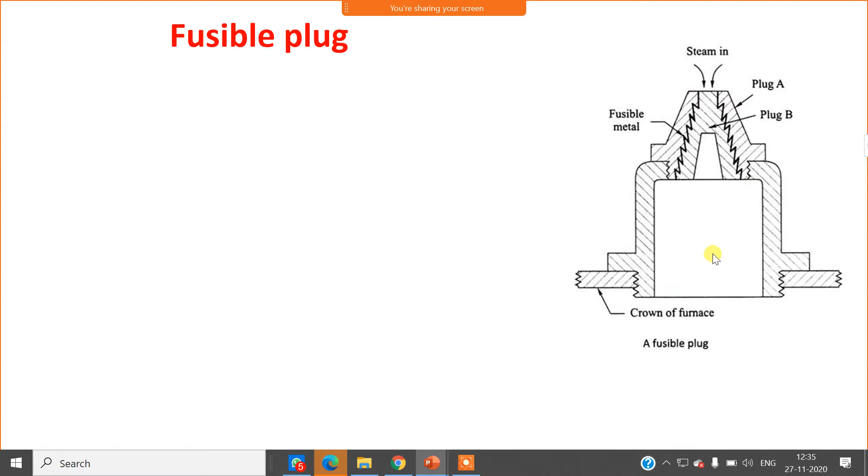Now to prevent the bursting and burning of the tube, fusible plug is provided. At very high temperature, fusible metal melts and it drops in the furnace, and it creates the opening for water to enter. Steam pushes the water inside the furnace, and in the furnace fire extinguishes. Fire stops, so that the combustion stops and formation of steam stops. The function of fusible plug is to prevent the boiler against damage due to overheating for low water level.

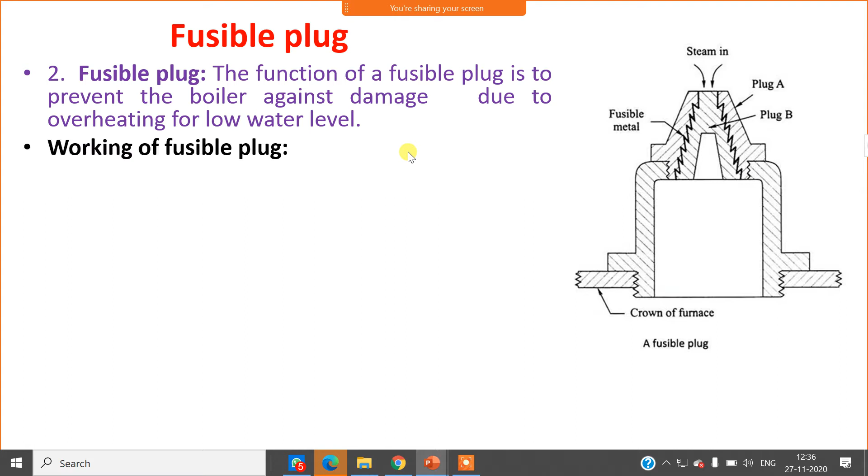If the water level is very low and due to high temperature, fusible plug prevents the boiler against damage due to overheating. Now working of fusible plug: during normal operation, the fusible plug is submerged in the water so that it should not melt at operating condition.

Fusible plug melts only when the temperature is above the operating condition. During the normal operation, the fusible plug is submerged in the water, which keeps the temperature of the fusible metal below the melting point. But when the water level falls below the top of the fusible plug, it is uncovered by the water, then due to high temperature, fusible metal melts. The fusible plug therefore melts by the heat of the furnace.

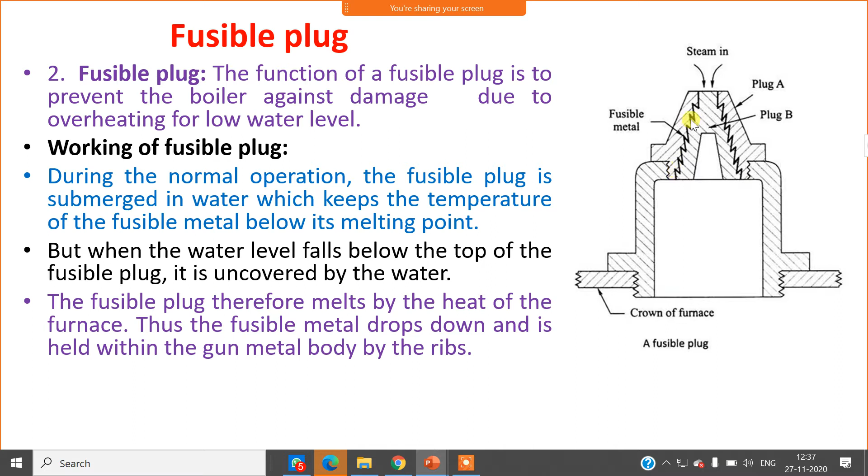Thus the fusible metal drops down and is held within the gunmetal body by the ribs. The fusible plug is made up of gunmetal, but fusible metal is different. The metal which is going to melt is called fusible metal. It is made up of different material, and the fusible plug is made up of gunmetal to avoid rusting.

The opening so made allows the steam to rush into the furnace and extinguish the fire. The opening created in the fusible plug allows the water and steam to enter to extinguish the fire. The damage to the firebox which could burn up is avoided. Due to overheating, the damage to the boiler can be avoided with the help of fusible plug.

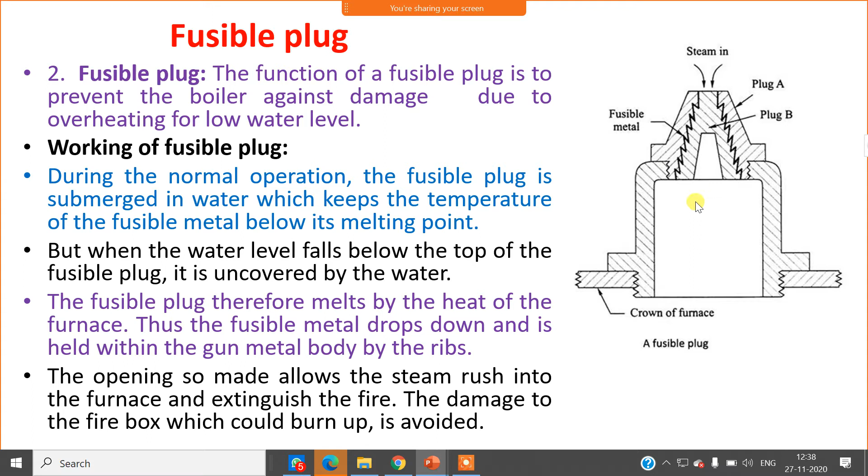Now there are different shapes of fusible plug. Here you can see three different sizes of fusible plug, and this is a different shape of fusible plug. Inside the upper portion, here you can see white portion. White portion is a fusible metal. Due to high temperature, this fusible metal melts and creates opening, and from this opening steam enters in the furnace and fire stops.

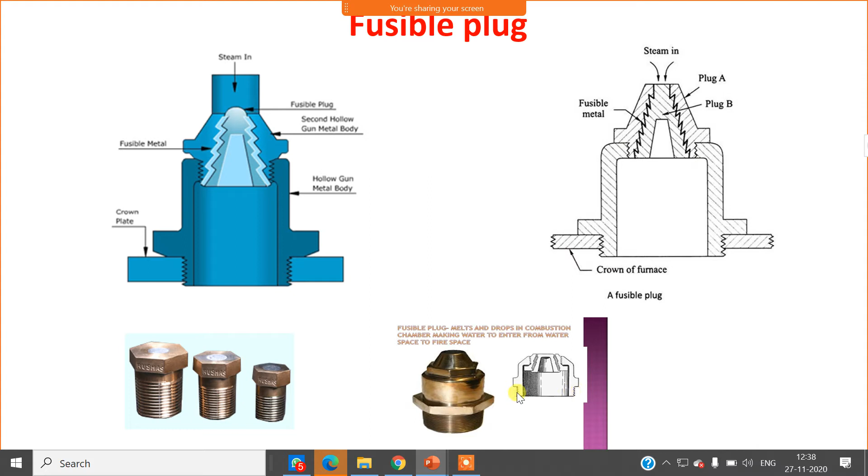Next mounting, steam stop valve. Steam stop valve is used to supply the steam which is generated in the boiler to the application area. If we take an example of steam engine, steam stop valve supplies the steam to the piston cylinder arrangement which is used in the steam engine. Or if we take an example of steam turbine, then steam stop valve supplies the steam to the turbine or prime mover.

Now it consists of lower flange. The lower flange is mounted on the boiler shell. Now this has an opening. Through this opening, steam enters in the steam stop valve. Steam stop valve consists of a wheel which is attached to the spindle. The lower end of this spindle is connected to the valve, and valve is mounted on the valve seat.

Now this spindle is supported on the steam stop valve cover. Then it is further supported by the yoke, which is connected with the studs, and there is a gland. The gland provides the proper rotation of a wheel.

Now here on the spindle there are threads, and in the gland there is a thread, meaning this spindle rotates in the thread of the gland. The clockwise rotation of the wheel moves the valve in the downward direction, and anti-clockwise rotation of the wheel moves it in the upward direction.

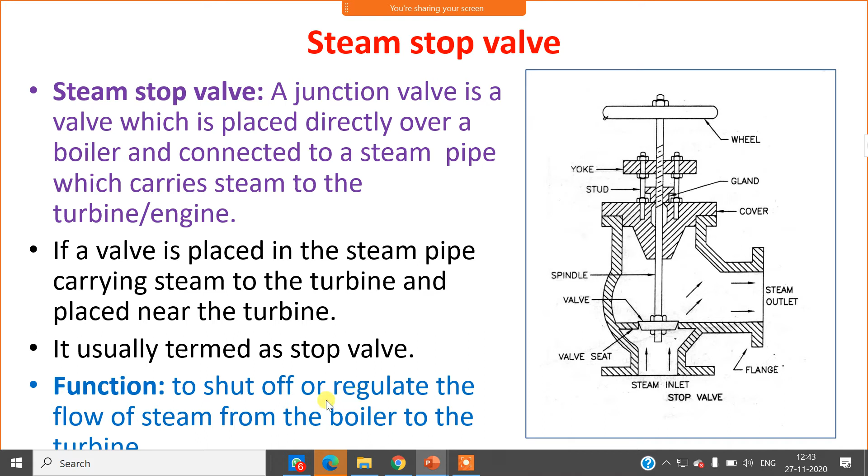Now, its function is to shut off or regulate the flow of steam from the boiler to the turbine. To shut off means to stop. When the hand wheel is turned, the spindle, which is screwed through the nut, is raised or lowered depending upon the sense of rotation of the wheel.

This is the wheel to which the spindle is connected, a spindle having threads which is rotated in the gland, and the movement of the spindle depends upon the sense of rotation of the wheel. The passage for flow of steam is set on opening of the valve.

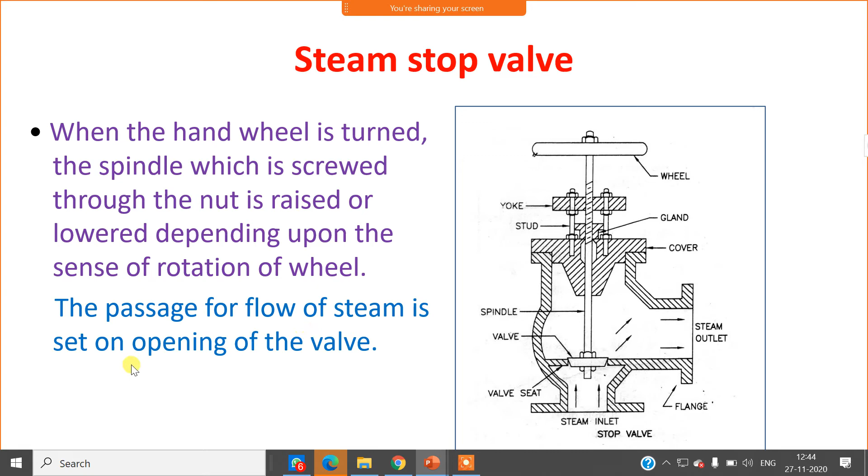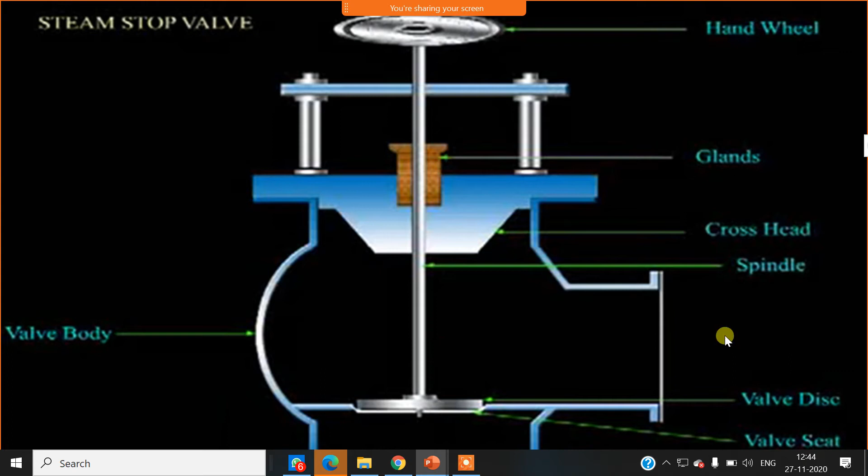Now here you can see this is the seat and this is the valve. When this hand wheel is rotated, the movement of the valve takes place. When the hand wheel is rotated for opening the valve, this valve moves in the upward direction and creates the opening for steam to supply the engine or turbine.

Next, the feed check valve. The feed check valve is the same as the steam stop valve, but different in function. The function of the steam stop valve is to supply steam to the turbine. The function of the feed check valve is to take water from the hot well and supply high pressure water to the boiler. The steam stop valve handles steam and the feed check valve handles water.

Therefore, there is a difference in material of the feed check valve and the steam stop valve. The steam stop valve handles steam because it has to carry steam to the turbine. The feed check valve handles water, which is at high temperature and high pressure, and supplies high pressure water to the boiler.

Now the feed check valve supplies the water at higher pressure than the boiler pressure. If the pressure of water is less than the boiler pressure, the feed check valve remains closed. The feed check valve opens only when the water pressure is greater than the boiler pressure.

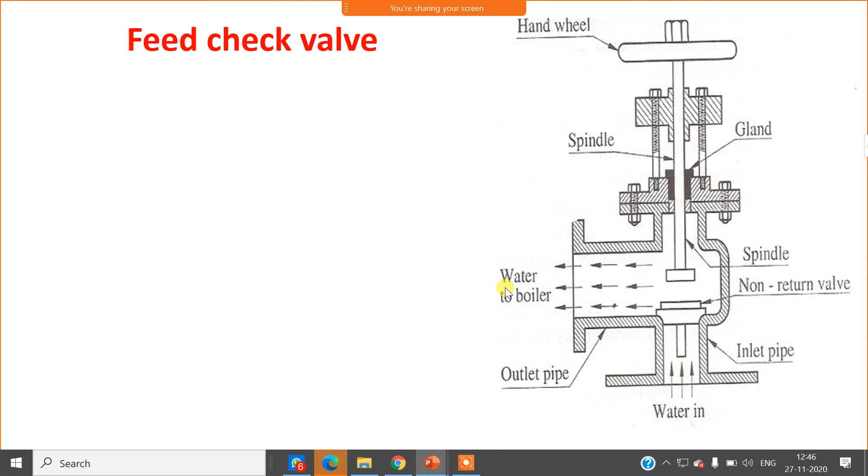Moreover, the function of the feed check valve is the same as that of the steam stop valve, with only a slight difference in construction and function. The function of the feed check valve is to control the supply of water to the boiler and to prevent the escape of water from the boiler when the pump pressure is less than the boiler pressure.

The function of the feed check valve is to supply water from the hot well to the boiler and to prevent the back movement of water from the boiler to the hot well. When the pressure in the boiler is greater than the pump, in that case this valve remains closed.

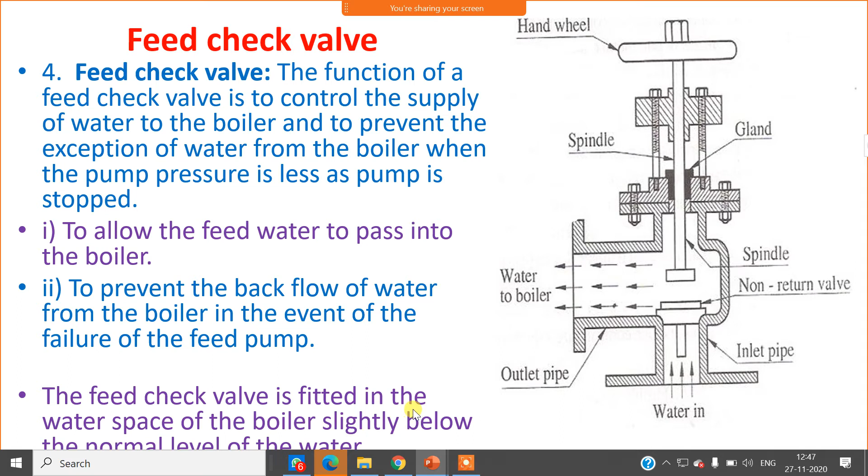It allows the feed water to pass into the boiler and prevents the backflow of water from the boiler in the event of failure of the feed pump. Suppose the feed pump has failed; it stops the water from the boiler escaping. The feed check valve is fitted in the water space of the boiler slightly below the normal level of the water.

Now, blow off cock. A blow off cock is a type of tap. It is just like a tap which we use at our home. We use a tap for draining the water from the tank or the pipeline. Similarly, the blow off cock is used for draining the water from the boiler in case we need to stop the working of the boiler. In that case, we need to empty the boiler. We will open the blow off cock and the water in the boiler will be removed. This is the first case.

Now, the blow off cock is used every 5 to 6 hours for removing the mud and impurities collected at the bottom of the boiler. Water supplied to the boiler contains impurities. When the water is converted into steam, impurities in the water settle down in the boiler. If the impurities are not removed, they form scale which reduces the heat transfer. If the heat transfer rate reduces, due to overheating the boiler can burst and the water tubes can burn out. Therefore, to avoid this, the blow off cock is operated every 5 to 6 hours for removing the mud and impurities from the boiler.

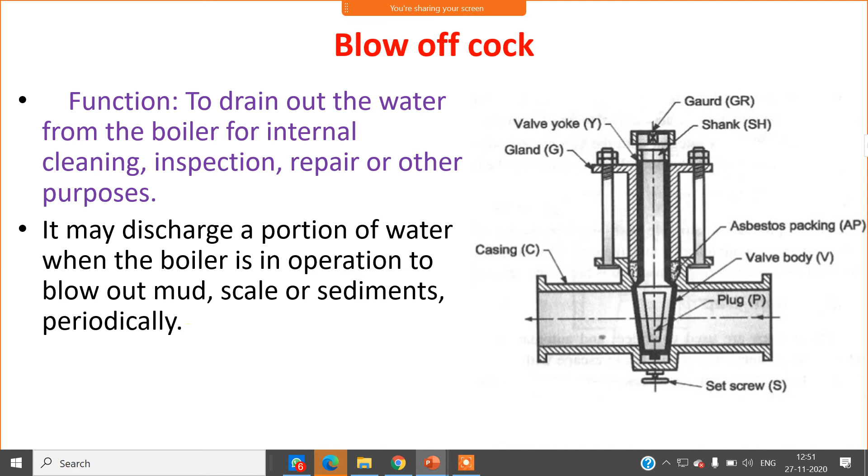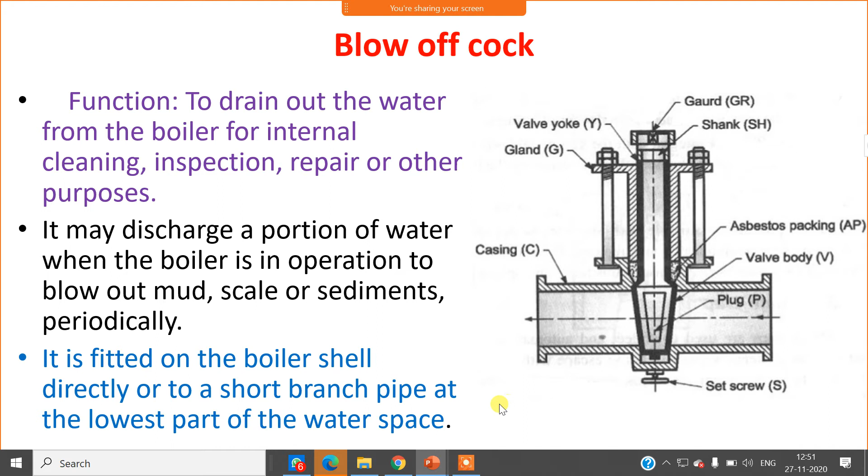It may discharge a portion of water when the boiler is in operation to blow out the mud, scale or sediment periodically, and that period is 5 to 6 hours. Every 5 to 6 hours this blow off cock is opened to remove mud and impurities. It is fitted on the boiler shell directly or to a short branch pipe at the lowest part of the water space, so that collected impurities can be removed.

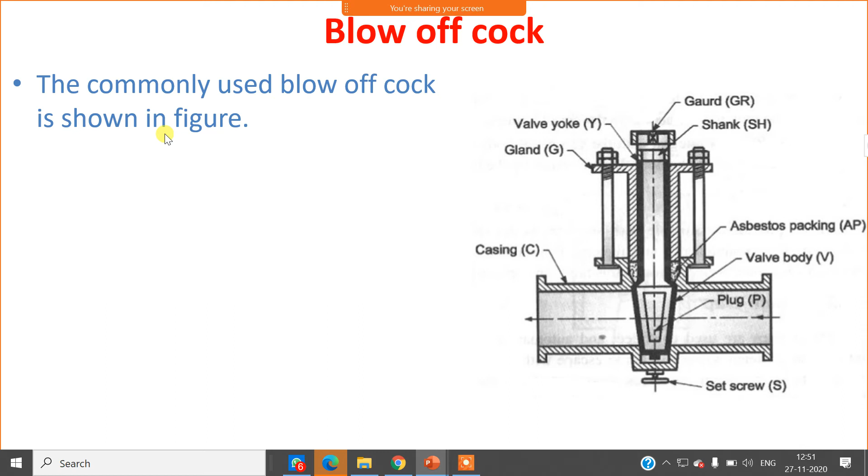The commonly used blow off cock is shown in the figure. It consists of a conical plug fitted accurately in a similar casing. This is the casing; this conical plug is fitted in the casing. The plug has a rectangular opening which may be brought in line with the passage by rotating the plug. When this plug is rotated, this rectangular opening matches the opening of the casing, and then water is removed from the boiler. This causes the water to discharge from the boiler.

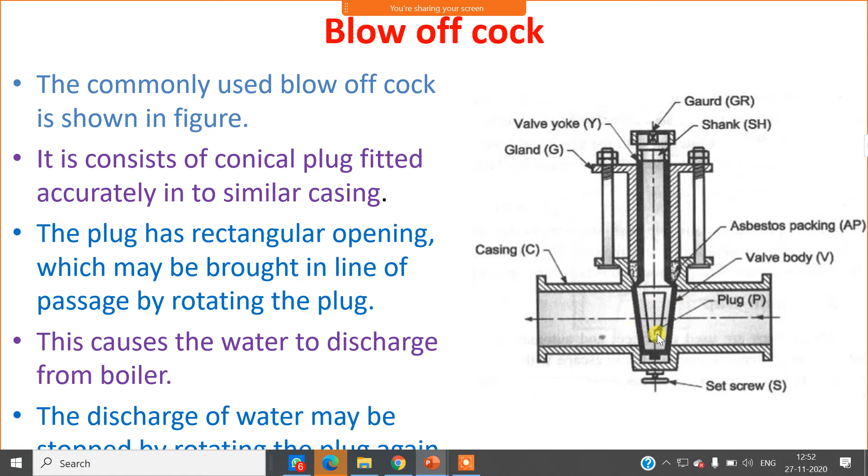The discharge of water may be stopped by rotating the plug again. The discharge of water from the blow off cock can be stopped by rotating this plug again.

Next is the safety valve. The function of the safety valve is to release the excess steam when the pressure of steam inside the boiler exceeds the rated pressure. If the boiler pressure is above the working pressure, the safety valve comes into action, opens and allows excess steam to escape to the atmosphere so that working pressure can be maintained. The safety valve closes when the pressure of the steam comes below the working pressure.

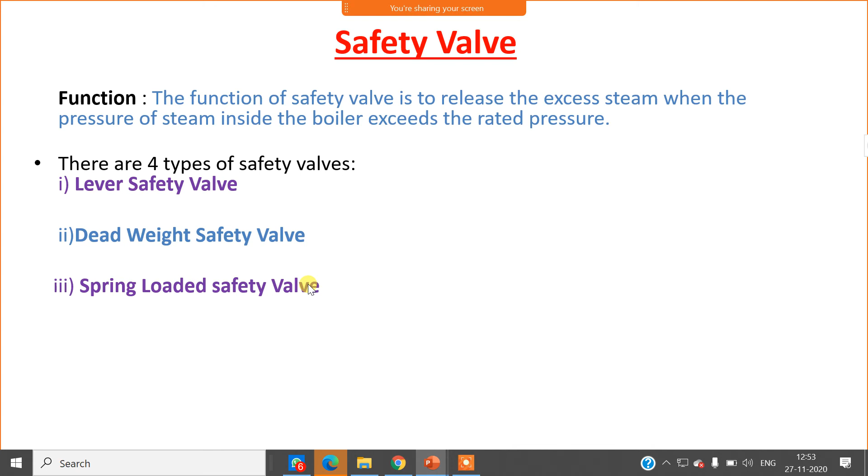Now there are four types of safety valve. First is the lever safety valve, second the dead weight safety valve, third the spring loaded safety valve, and fourth is the high steam and low water safety valve.

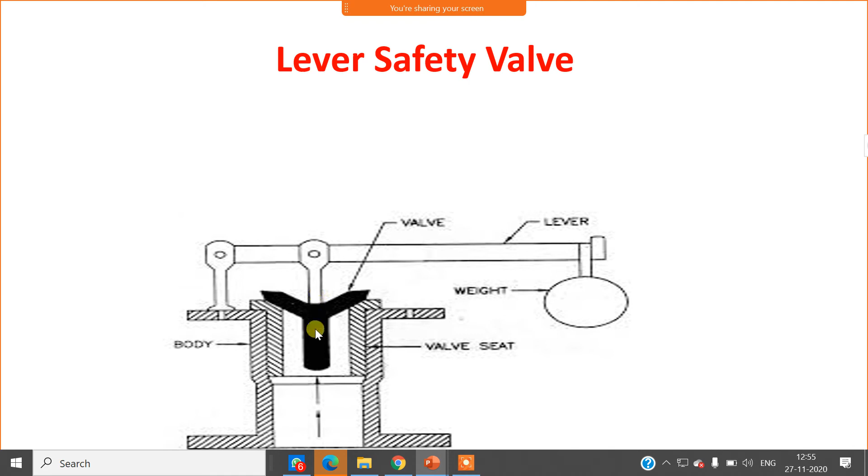When steam enters the safety valve and overcomes the inertia of the weight connected on the lever safety valve, then this valve lifts up and creates an opening for steam to escape.

It consists of a valve resting over a gunmetal seat. This is a gunmetal seat, and this gunmetal seat is screwed on the body. The valve seat is fixed on the mounting block fitted over the boiler shell. This body is mounted on the boiler chest with the help of a flange.

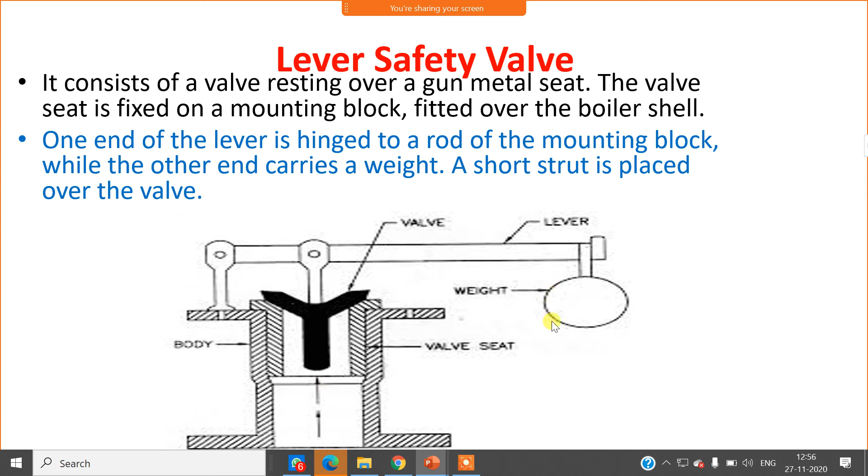One end of the lever is hinged to the rod of the mounting block, while the other end carries the weight. Now by increasing this weight, we can increase the working pressure of the boiler. If we want to decrease the working pressure, we can reduce the weight connected on the other end of the lever.

Next, dead weight safety valve. The dead weight safety valve is similar to the lever safety valve, but the difference is that in the lever safety valve, one end is hinged and the other end carries a weight. But in this case, it consists of a weight carrier, and the weight carrier carries the weight. W represents the weight and C represents the weight carrier.

Now P is a steam pipe. On the steam pipe, you can see in black color there is a valve seat, and on the valve seat there is a valve. V represents the valve and S represents the valve seat. Now the valve is resting under the weight.

When steam enters the steam pipe, it applies force on the valve. When the steam overcomes the weight attached on the dead weight safety valve, this valve lifts up and creates the opening for steam to escape. Now the advantage of the dead weight safety valve is that we can adjust the pressure by removing and adding weight.

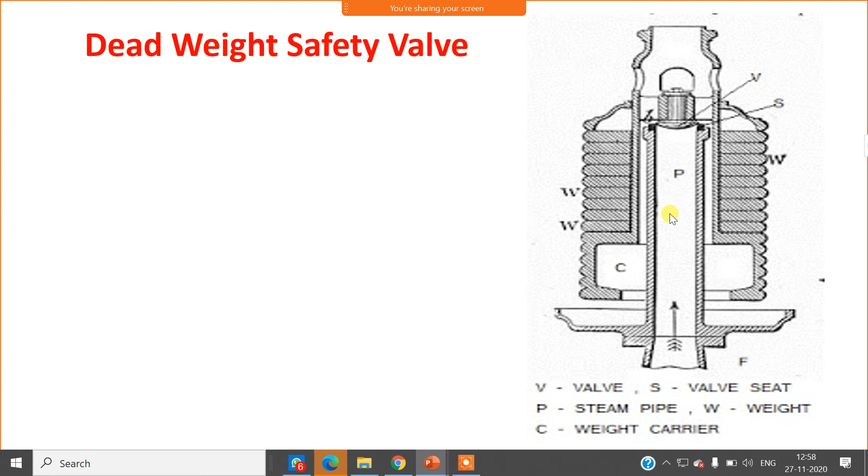Okay, the dead weight safety valve consists of a valve V. You can see here, this is the valve V, which is made of gunmetal to prevent rusting. Most valves are made of gunmetal to prevent rusting. It rests on the gunmetal seat S. You can see the black portion.

This is the gunmetal seat, and it's fixed to the top of the vertical steam pipe. This is a vertical steam pipe on which there is a seat, and on the seat the valve is mounted. The pipe has a flange at the bottom for fixing at the top of the boiler shell.

A weight carrier is suspended from the top of the boiler. This is the weight carrier, and on the weight carrier weights are placed. It carries cast iron rings, meaning weights.

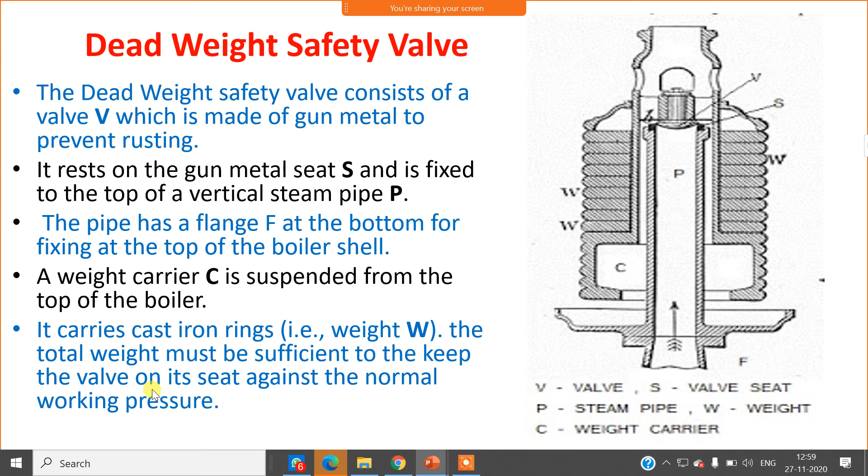The total weight must be sufficient to keep the valve on its seat against the normal working pressure. This weight is calculated in such a way that it is sufficient to handle the working pressure.

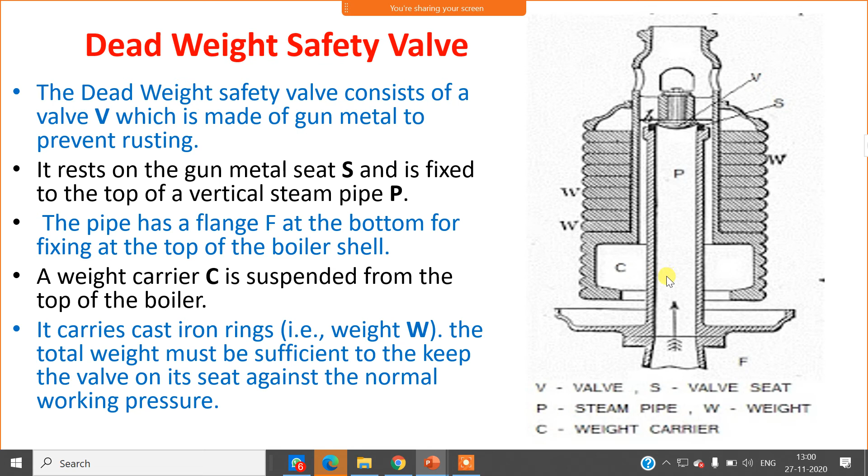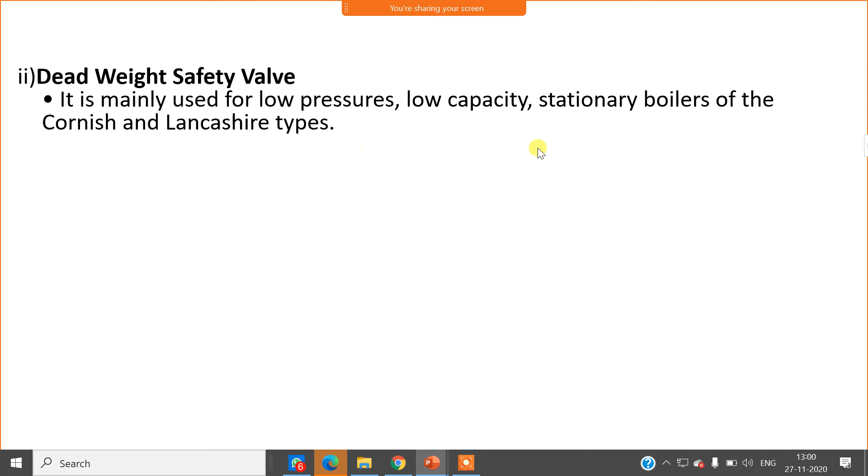It is mainly used for low pressure, low capacity stationary boilers like the Cornish and Lancashire boiler. This is not suitable for moving boilers.

Merit: simplicity in design. It is very simple in design and gives quite satisfactory performance during operation. It cannot be easily tempered for pressure adjustment. If you want to decrease the working pressure, we can remove the weight ring. If you want to increase the working pressure, we can add weight.

Demerit: unsuitable for use on any boiler where extensive vibration and movement are experienced. In a boiler where excessive vibration or movement of the boiler is there, this is not suitable. Example: locomotive and marine work.

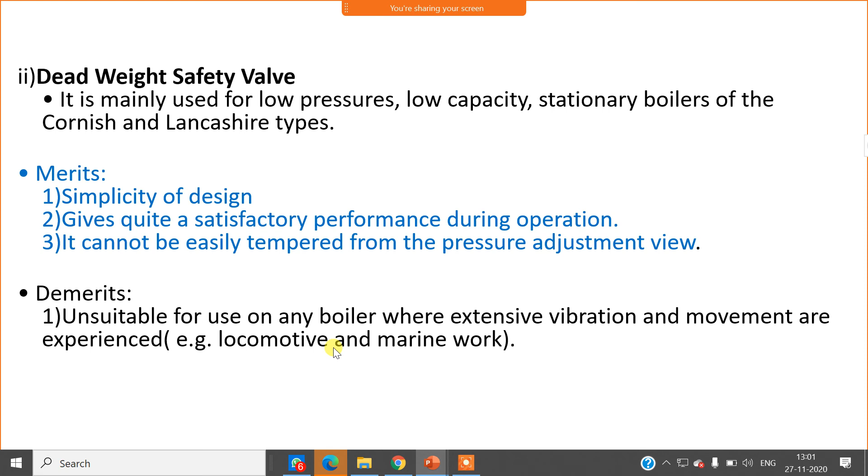It is not suitable for high pressure boilers because a large amount of weight is required to balance the steam pressure. If you use a dead weight safety valve for a high pressure boiler, it would require a large number of weight rings.

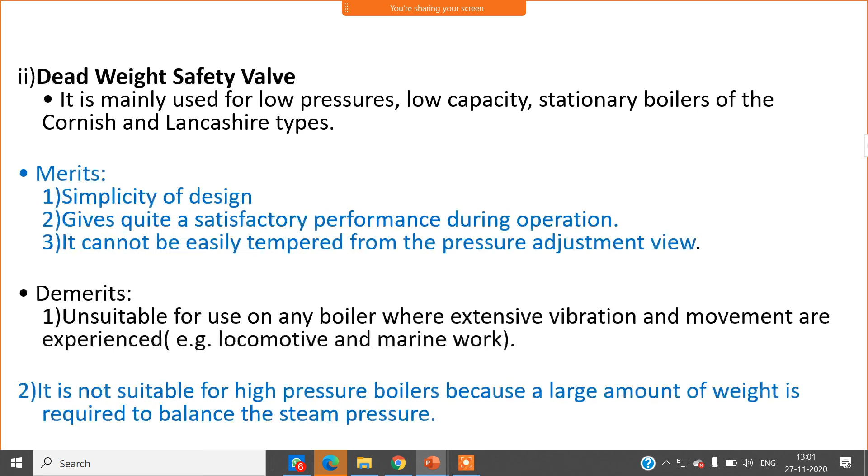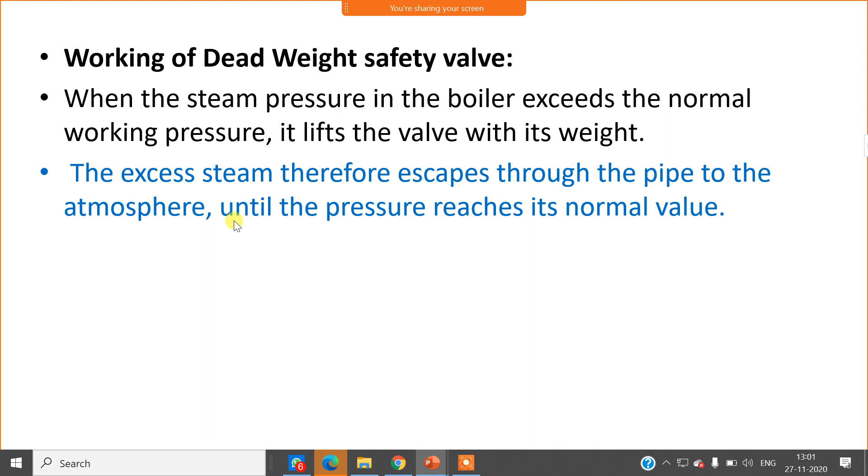The working of dead weight safety valve: when the steam pressure in the boiler exceeds the normal working pressure, it lifts the valve with its weight. The excess steam therefore escapes through the pipe to the atmosphere until the pressure reaches its normal value.

When steam enters in pipe 1 or pipe 2, it applies pressure on the valve against the spring. When the steam pressure overcomes the spring force, the valve lifts up, creates an opening, and supplies the exhausted steam to the surrounding.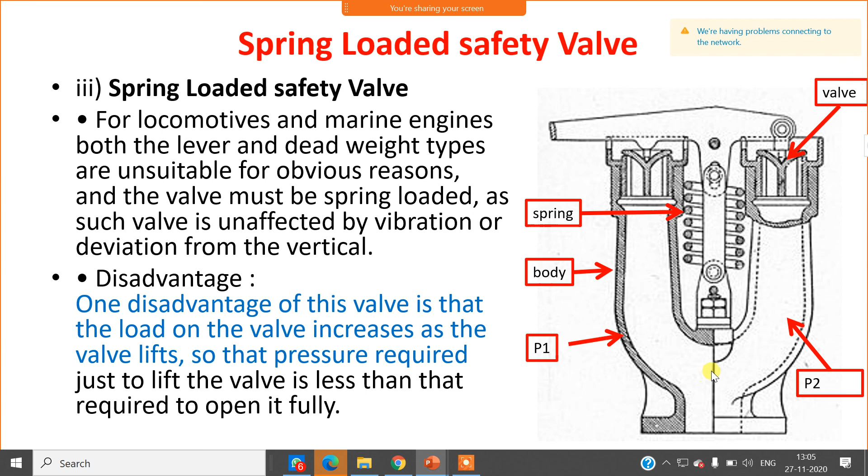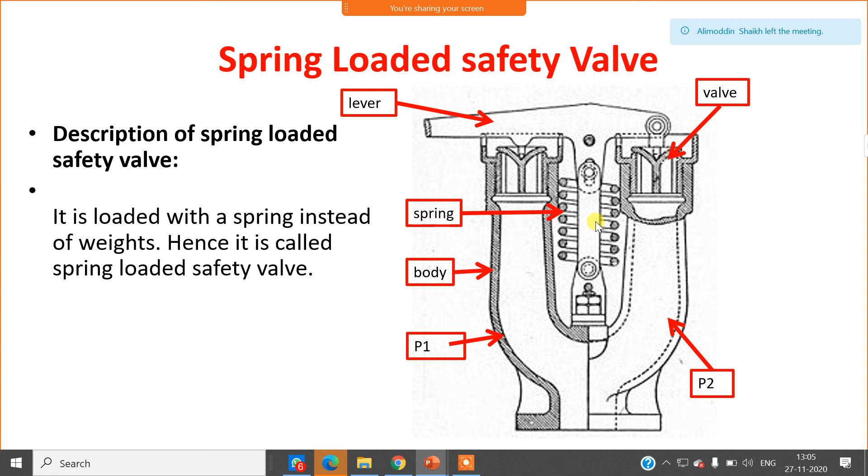Now, description of the spring loaded safety valve. It is loaded with a spring instead of weight. In the dead weight safety valve, weight was used for maintaining the pressure in the boiler, but in this case, spring load is used for maintaining the pressure in the boiler. Hence, it is called spring loaded safety valve.

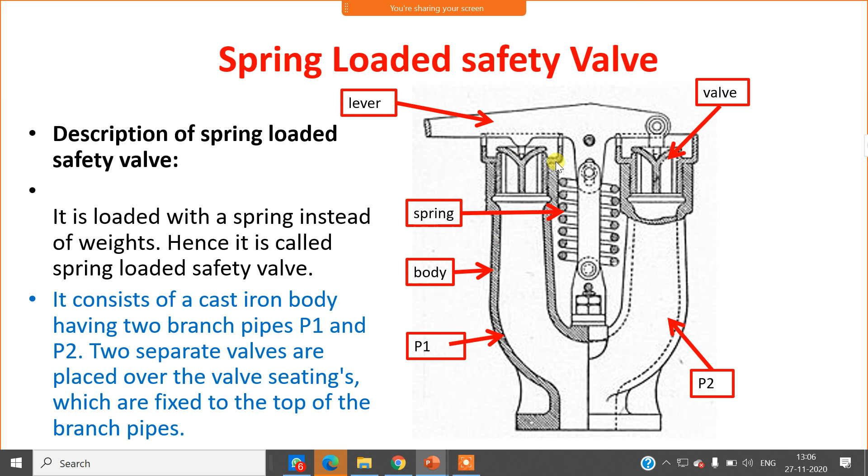It consists of a cast iron body having two branch pipes P1 and P2. When steam enters the spring loaded safety valve, it is divided into pipe 1 and pipe 2. Two separate valves are placed over valve seatings, which are fixed to the top of the branch pipes. Here you can see there are two separate safety valves used, which are fitted on the branch pipe.

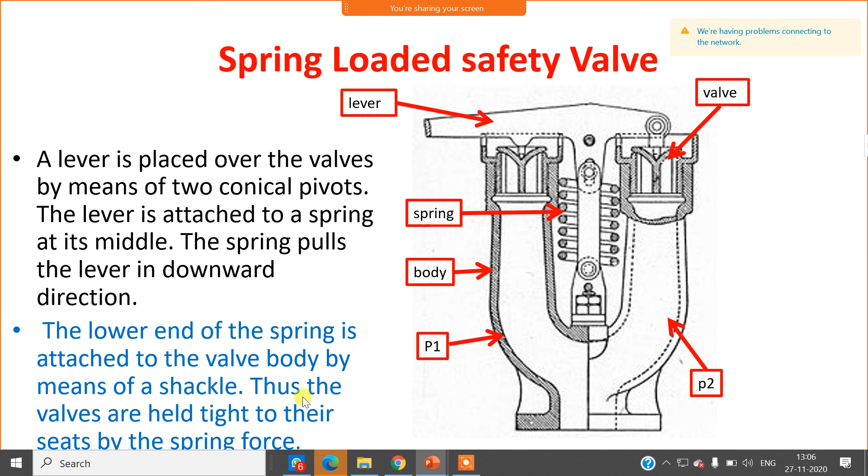A lever is placed over the valves. One valve is fitted on the fulcrum, and the other valve is also fitted on the lever. This lever is supported on the shackle with the help of a spring. The lower end of the spring is attached to the valve body by means of the shackle. Thus, the valves are held tight to their seat by the spring force.

Now, working: when the steam pressure exceeds the normal working pressure, the valve rises up against the action of the spring and allows steam to escape from the boiler till the pressure in the boiler reaches its working pressure. The spring loaded safety valve is much lighter and compact compared with other safety valves.